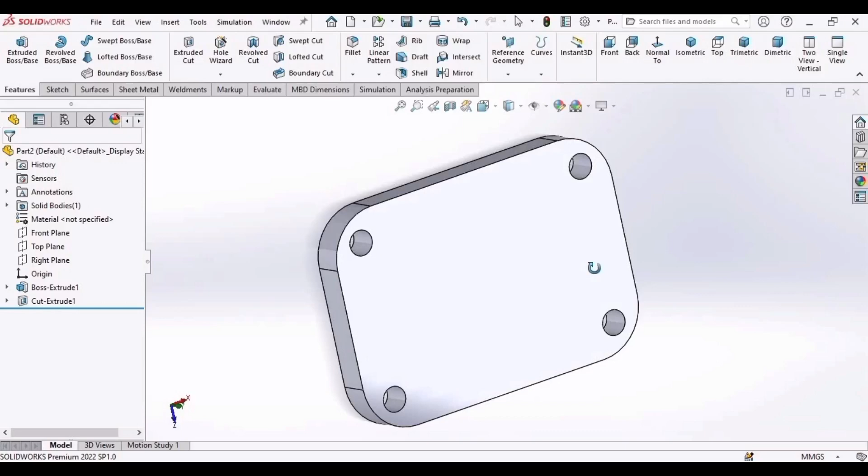Welcome to this video in which you will learn how to make this 3D printable part. In step 1, we will sketch the part. In step 2, we will learn how to extrude this part. In step 3, we will learn how to make holes in the part. And in step 4, we will learn how to fillet the edges.

So let's begin. At first, you have to open a new part file. For that, click here and then select new. Select the part, this one, and then click OK. It will take some time, and here you have to select this top plane and then click on sketch.

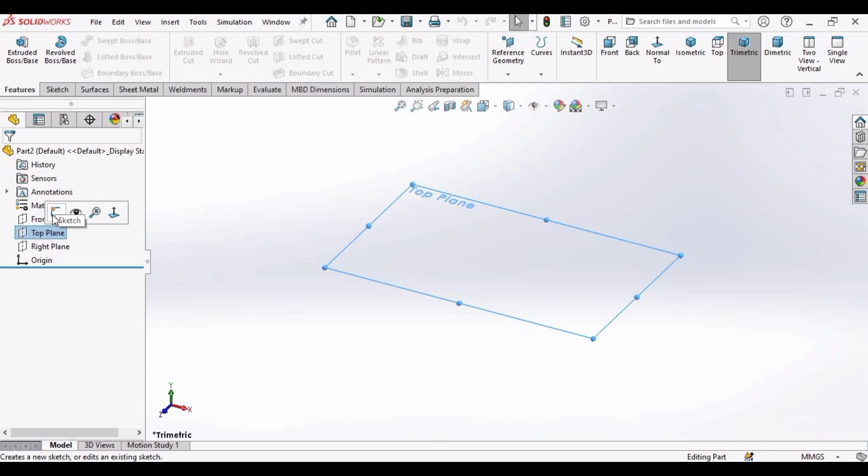Now we have to make a rectangle. For that, select this line and click here in this environment and make a horizontal line, then this vertical line, then this horizontal line, and a vertical line. We can do the same thing by using another command.

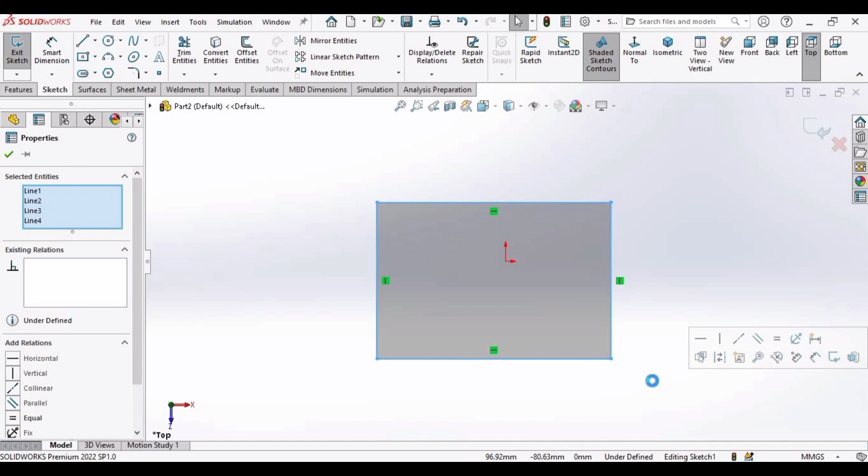Drop down this menu and select the center rectangle. Then click here and expand this rectangle, and we can very easily make this rectangle by using the simple center rectangle. Now select this smart dimensioning tool, select this line and specify the length of this line as 50.

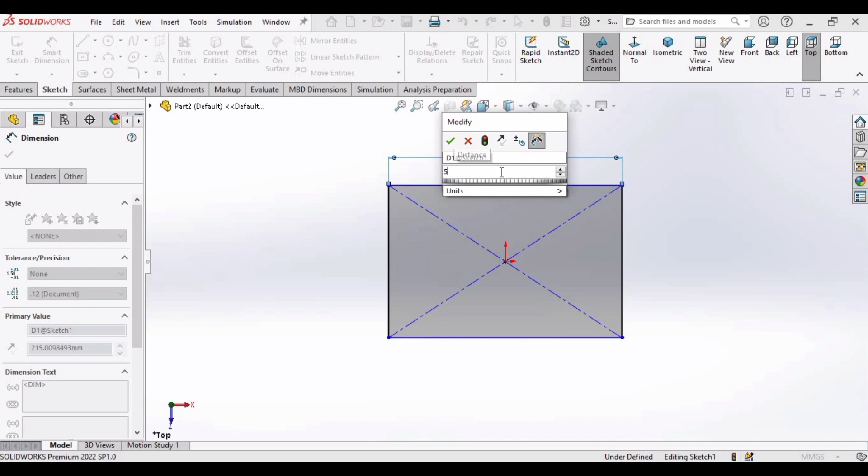By default, the units are selected as millimeters, so this is 50 millimeter. Now select this line and then click here and specify 35 as dimension.

Now simply check this box, go to features, and now select this Extruded Boss base command. This will convert it into a 3D part.

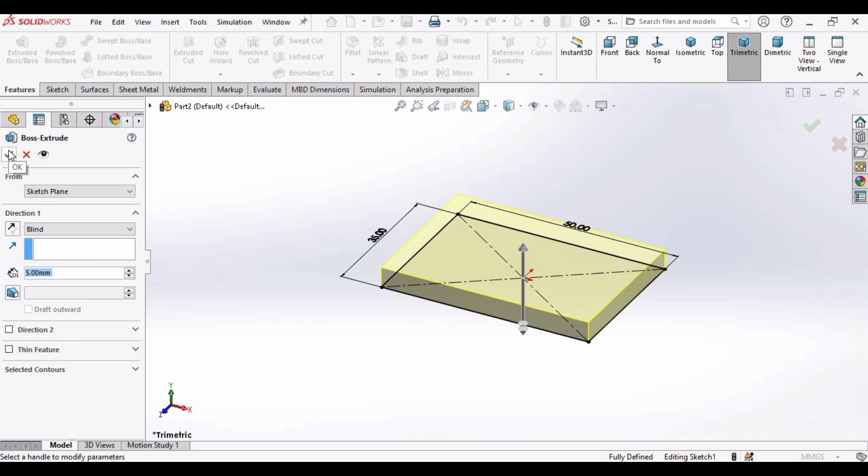I will always recommend to specify dimensions from here. So here specify 5 millimeter, and now here we can see the height of this part is 5 millimeter. Simply check this box, and here you can see a 3-dimensional part has been created.

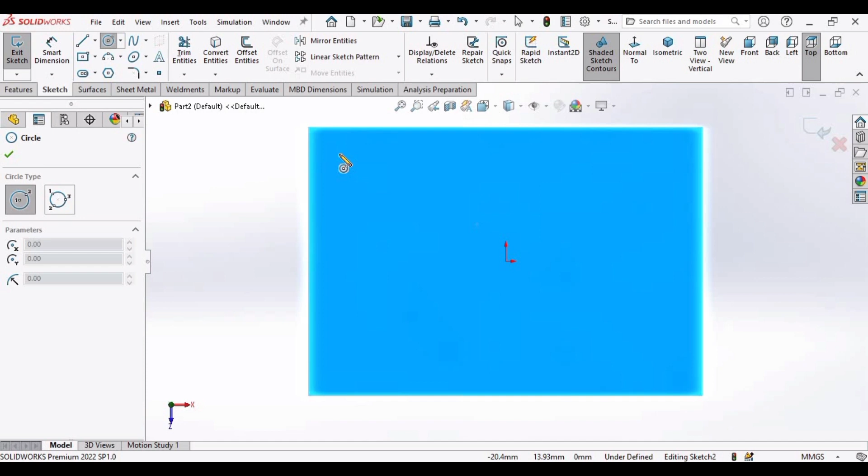Now select this face and click on sketch, and now select this circle because we want to cut circular holes on this part. Make a circle here, and now we have to specify the dimensions. For that, select this smart dimensioning tool, select this circle, and here specify the diameter as 4.

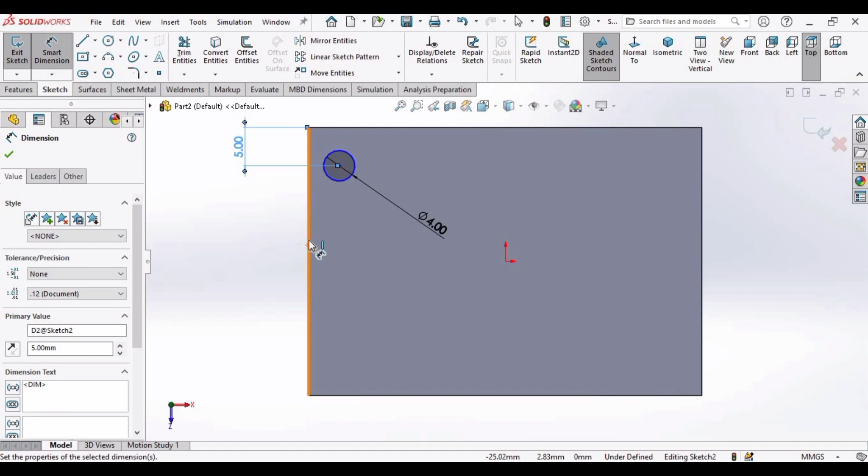Okay, now select this line and select this center of the circle, and here specify 5. And now select this vertical line and select this center of the circle, and here specify the distance as 5.

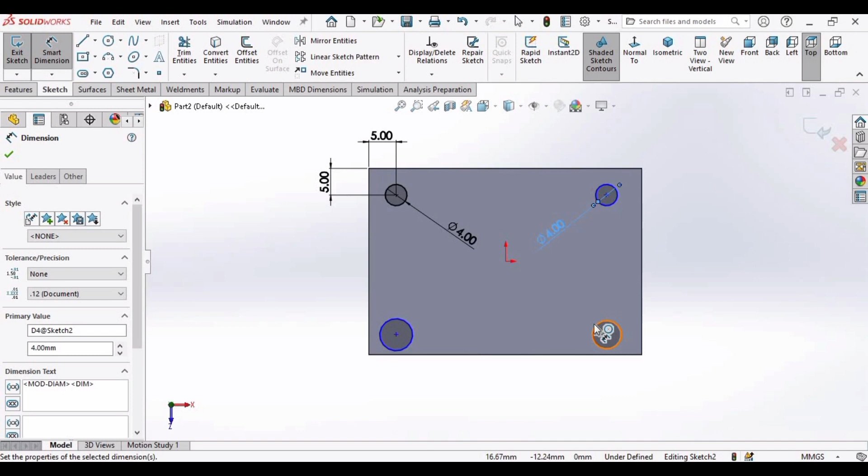Okay, now we have to do the same things, and we have to make 3 more circles. So make a circle here, then make 3 circles like this, and now we have to specify the diameter. For that, we have to select smart dimensioning tool, and here specify the diameter as 4, just like we have done with the first circle.

Select this circle and specify 4. Okay, and now we have to specify the distance from the corners. We have done this previously, 5 millimeter. And then from this line to the center, specify the distance as 5 millimeter again.

From this point to this point, 5 millimeter. Specify here 5 and then press enter. Select this line, select this center point and specify 5. And similarly specify 5 millimeter as the distance from the edges.

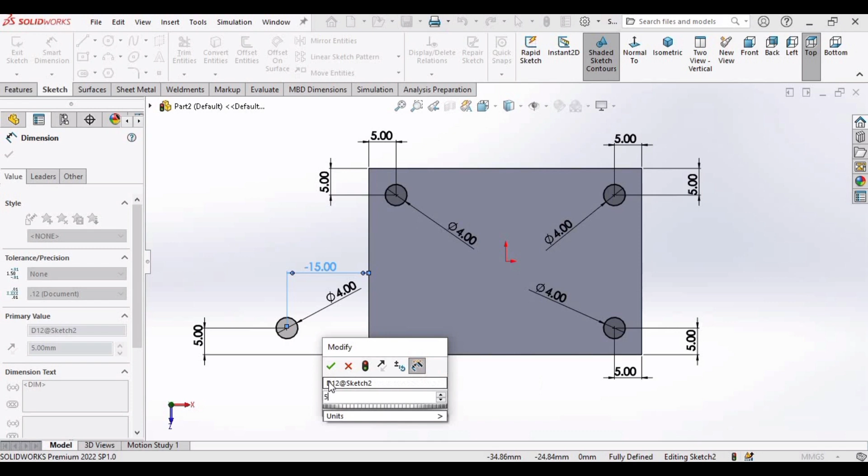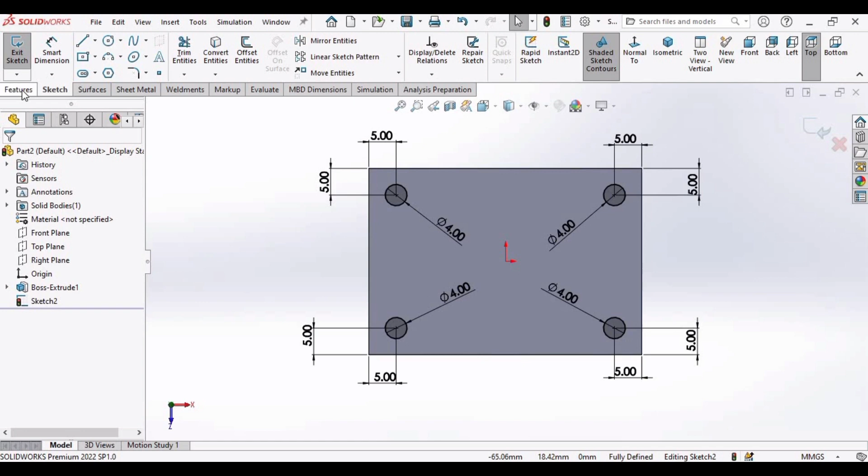And now here you can see all the dimensions and the parameters have been specified, and now we have to cut these holes. For that, go to features, this one, and select this extruded cut command, because we have to cut the holes from the part. Just check this box, and here you can see the holes have been made in this part.

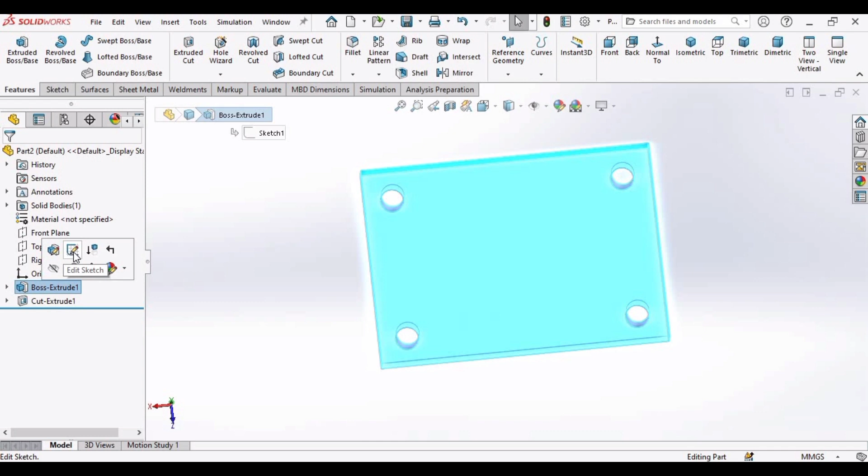And now it's time to make some fillets. So let's see how we can do that. Select this Boss Extrude and click on Edit Sketch. And here you can see this is our very first sketch. Now let's see how we can make these fillets.

Select this fillet command, and now we have to select 4 corners. This one, and you can zoom in, select this corner, select this corner, and finally this corner.

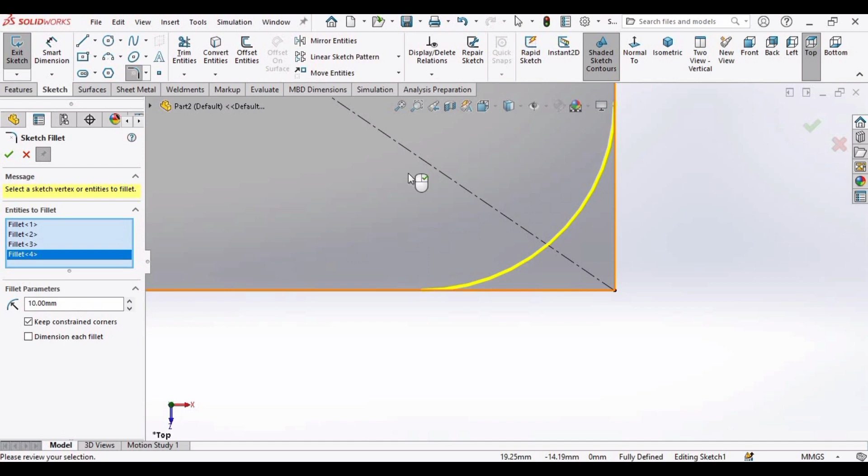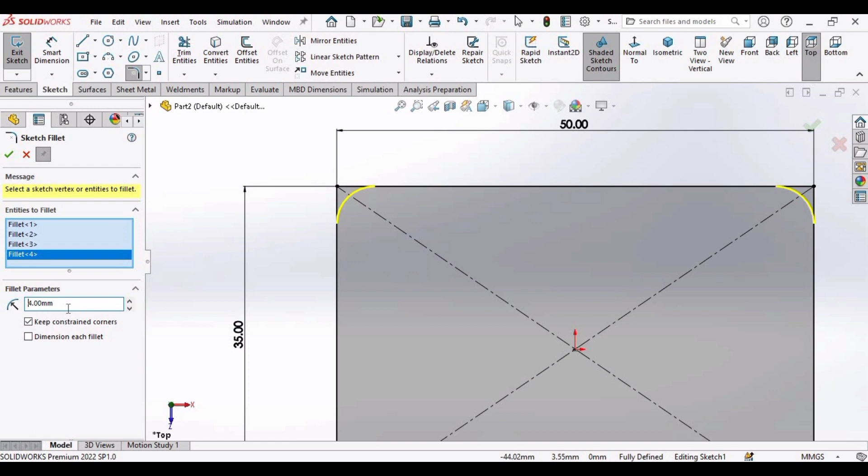And now we can specify the radius of these fillets. Let's specify here 7 and then click enter. Here you can see, let's specify as 4, and then press enter, and here you can see the radius has been decreased. Let's specify here again as 8 millimeter.

So that's looking fine. If we check this box and if we exit the sketch, this one here, we can exit the sketch, and you can see the fillets have been created.

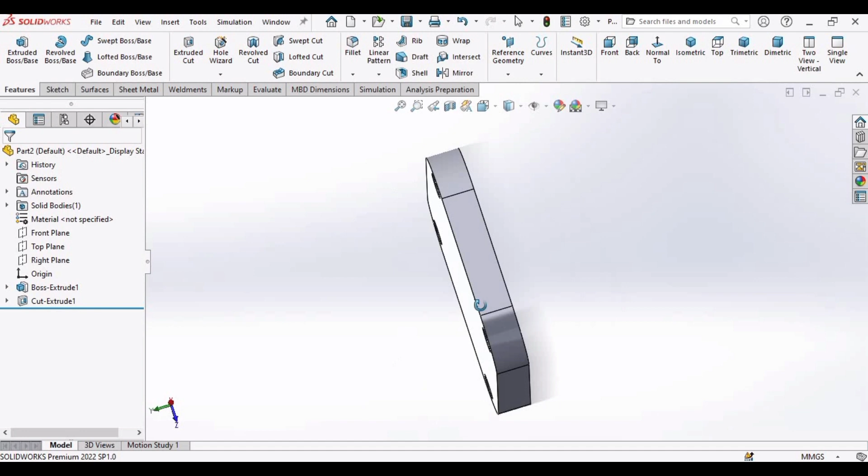And now we have to save this part. For that, we have to select here save as, and here we have to rename the part. So I am giving the name of this part as 3D printable part, and then click on the save option.

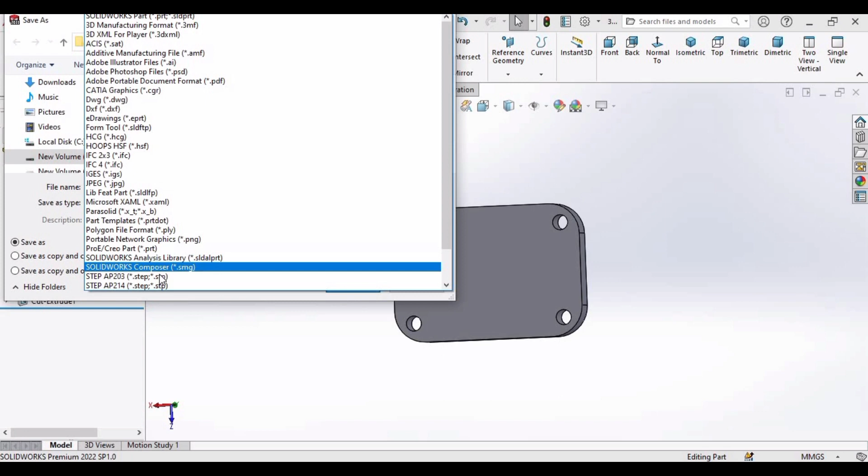Now go to file again and select this save as option. Here we have to drop down this menu, and here we have to find STL file, this one STL. Here you can see STL, and then click on save and then press enter again, or yes. So the part has been saved.

Let me show you. And here you can see both of the files, but this one is the 3D printable file. So if we right click on it and go to properties, and here you can see the file extension is .stl. We can make a 3D print of this file by using the 3D printer as well.